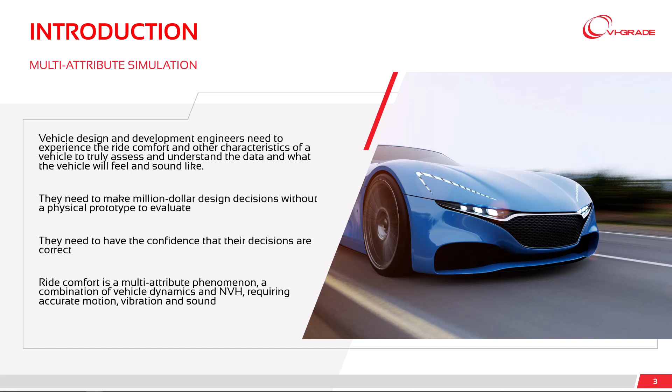A much more efficient approach is to try it before you build it. Eliminate the wasted time and cost of building multiple prototype iterations. Simulate and experience the results of the simulation in driving simulators first. Iterate much faster than previously possible with traditional approaches. This is the faster, easier, and safer approach to developing vehicles.

Now, let's talk about experiential simulation. When you drive your car, you excite different frequencies and therefore experience motion, vibration, and sound all at the same time. Usually, these characteristics are studied and engineered separately. Usually, development activities are carried out separately on separate prototypes or using separate CAE simulation models.

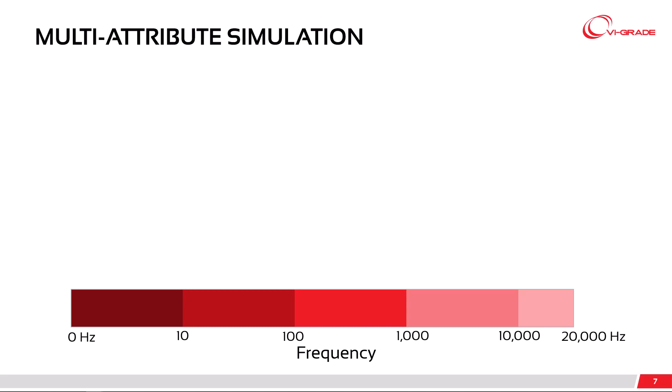But it's not just about how the car handles or rides and what it sounds or feels like, but all of these things together. Ideally, you would experience all aspects of a vehicle simultaneously when driving a virtual prototype. When we talk about simulating vehicle dynamics, sound, and vibration together, we need to define and understand the frequency ranges involved.

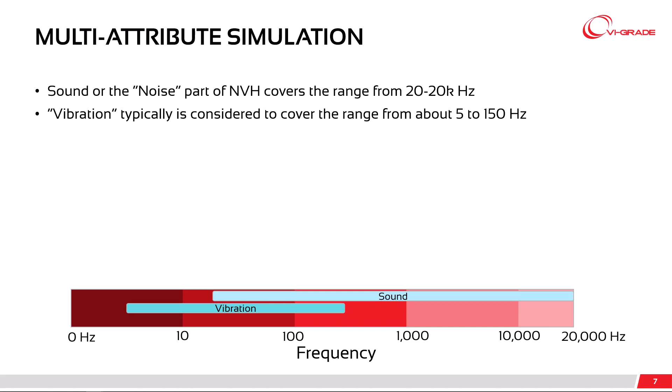Sound, or the noise part of NVH, generally covers the range from 20 Hz to 20 kHz. Vibration is typically considered to cover the range from about 5 to 150 Hz for the purpose of in-vehicle driver and passenger perception. Motion, the overall movement of the vehicle, is usually considered to be the 0 to 8 Hz range. Sound, vibration, and motion all interact and affect the overall perception of each other, especially in the overlap regions.

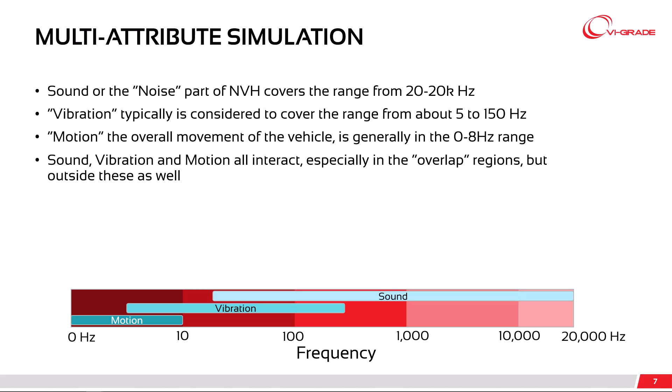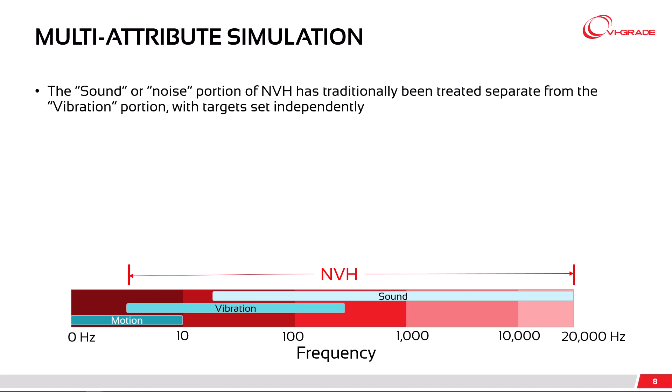The sound or noise portion of NVH has traditionally been treated separate from the vibration portion, with targets set independently. Likewise, vehicle dynamics, ride, and handling have typically been separated from sound and vibration. Again, especially in the overlap region, but not limited to this, there is a high degree of interaction, especially between what is considered ride quality and what is considered vibration.

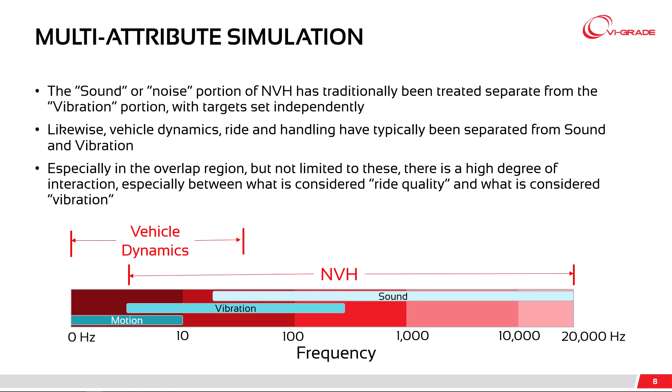A simulator that could accurately represent vehicle motion, ride, and handling together with accurate vehicle vibration and sound to a level of fidelity sufficient for target setting, evaluation, and confident decision-making is the goal.

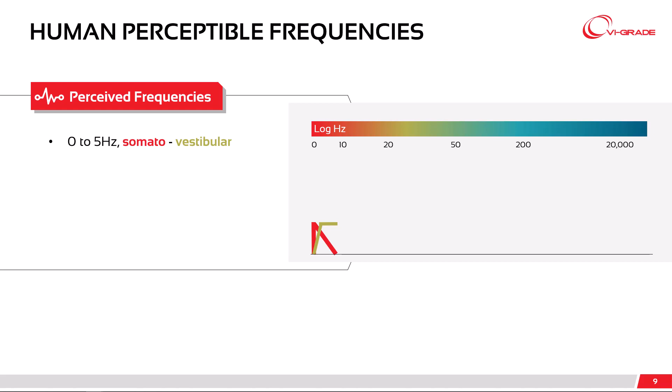As another viewpoint on the same concept, handling, ride, and ride comfort, vibration, and sound cover overlapping frequency ranges. From 0 to 5 Hz, the perception is primarily somatovestibular. From 5 to 30 Hz, this transitions to vestibular vibrational. From 10 to about 150 Hz is the range thought of and perceived as vibration. And spanning from 20 Hz to 20 kHz, the ears perceive sound.

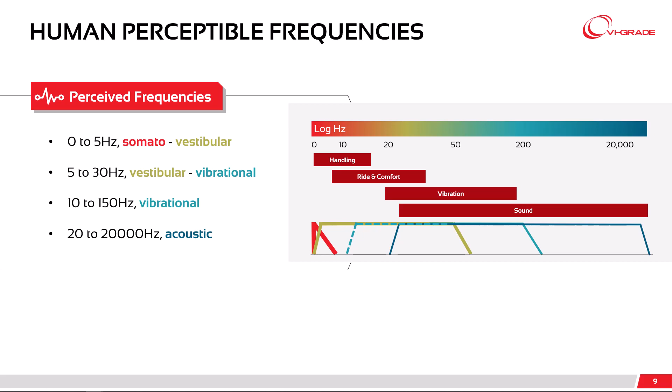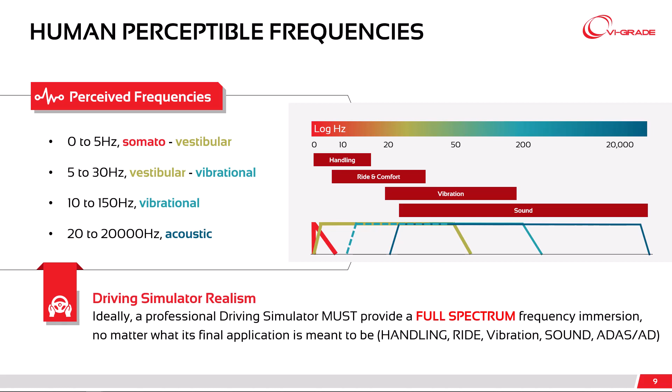Ideally, a professional driving simulator must provide a full spectrum frequency immersion, no matter what its final application is meant to be. When we look at how to build a multi-attribute simulator, it's useful to look at the various stages that comprise the overall experience. We start with handling, which is primarily 3 degrees of freedom up to approximately 15 Hz. This is the overall behavior of the vehicle.

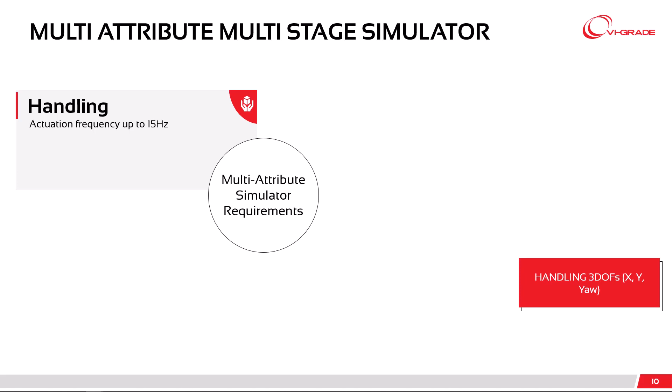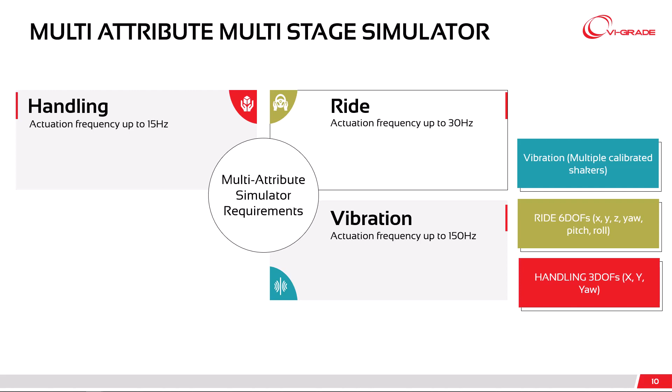Next is ride, which comprises 6 degrees of freedom up to about 30 Hz. Overlapping this, and perceived more locally at the driver touchpoints, is vibration, which extends up to about 150 Hz. And on top of this, we have sound, which covers the range from 20 Hz to 20 kHz.

Now we can take a look at a single attribute simulator. The NVH desktop simulator is essentially a single attribute simulator focused on sound. This has a tremendous capability, and engineers can use this to design the right sound into their vehicle through comparing sounds, modifying sounds, and really understanding the sounds and the way the component parts of the sound add up to the whole. This type of NVH simulator is used extensively in the automotive industry to understand vehicle sound and develop the sound character of vehicles.

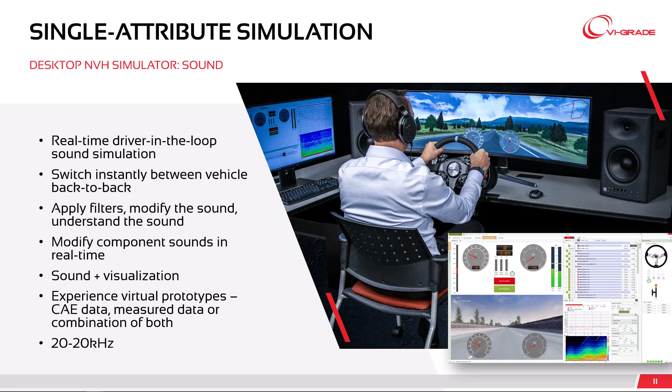But obviously, this is just sound. There is no vibration and no motion. Adding vibration to the sound adds a new dimension to the simulation. In this case, the static NVH simulator combines sound with multi-axial, calibrated vibration at all driver touchpoints. This is a very immersive simulation and could be considered to be a multi-attribute simulation, combining sound and vibration.

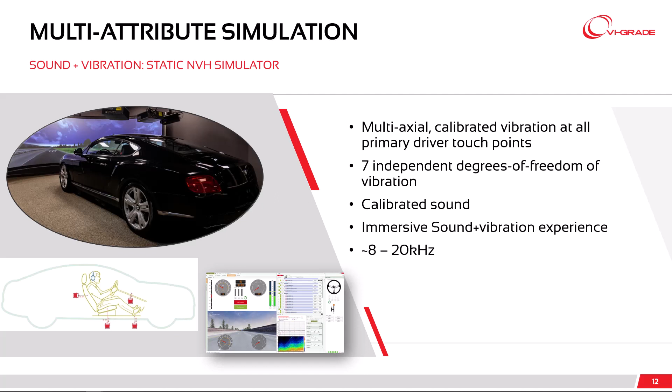Our compact NVH simulator has the same vibration plus sound capabilities as the static simulator, but in a much smaller footprint that can be easily accommodated in or close to the engineering office. Again, this provides the dual attribute simulation of sound and vibration to the design and development engineers.

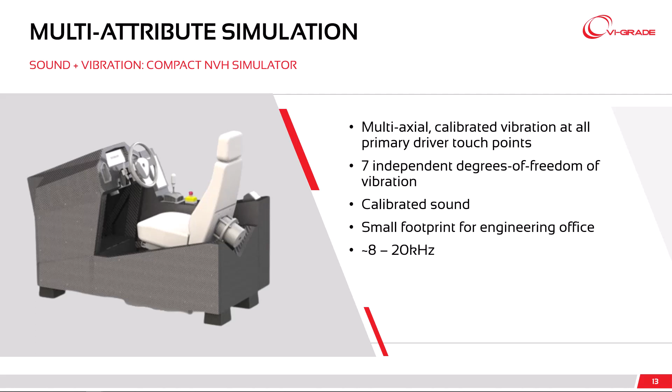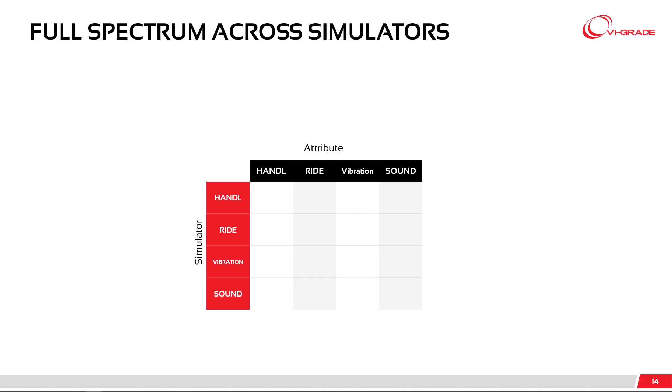Now, let's look at what would be the ideal situation for a full spectrum multi-attribute simulator combining ride, handling, sound, and vibration aspects. We can look individually at each attribute and the inputs to the simulator. For handling, driver demand, vehicle velocity, and chassis accelerations are the primary components provided to and simulated by the simulator.

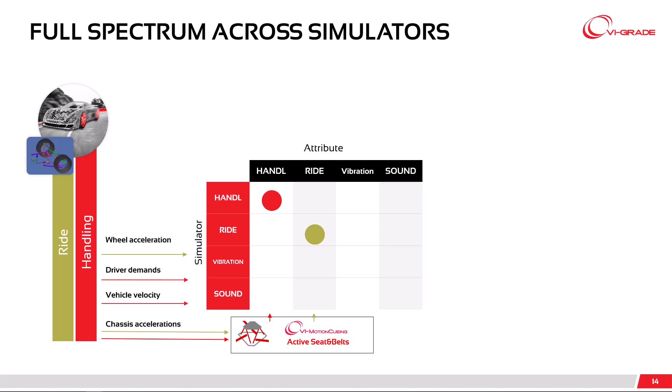Ride is primarily concentrated on the wheel hub accelerations and chassis accelerations. As we move to vibration, we are looking at wheel acceleration inputs, engine, motor, and driveline RPM as forcing functions coupled with vehicle response to these, together with the previous factors. And with sound, we are adding acoustic response to all of these.

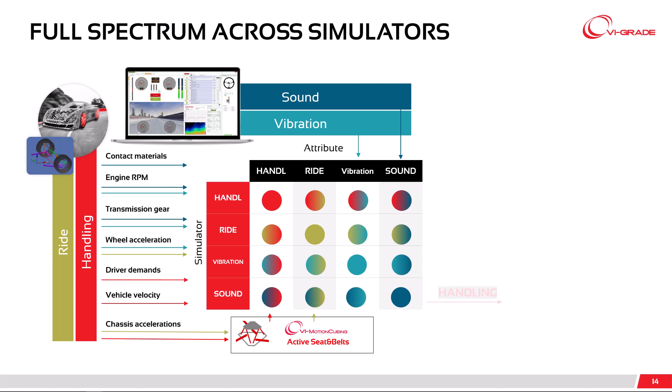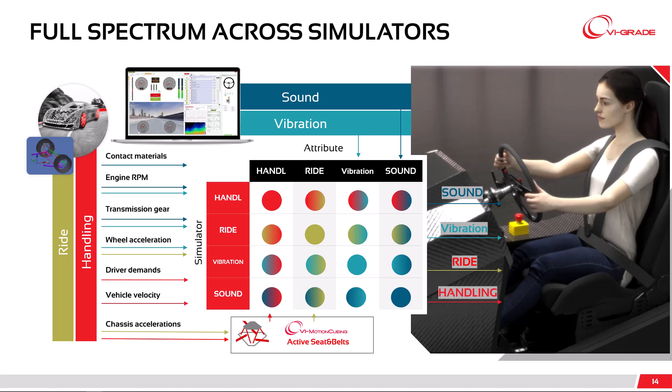The important thing, however, is that these 4 attributes interact and affect one another. In a real vehicle, they are inseparable. In a simulator, in the past, we have typically focused on one or two of these, but never four together, like in a real vehicle. So we decided to combine all of these factors in a single simulator.

The Compact FSS is the first real-time, driver-in-the-loop simulator to combine accurate motion, vibration, and sound in a single simulator. This is especially important when assessing virtual prototypes for things like ride comfort, where motion, vibration, and sound all combine into a single experience for the vehicle occupants.

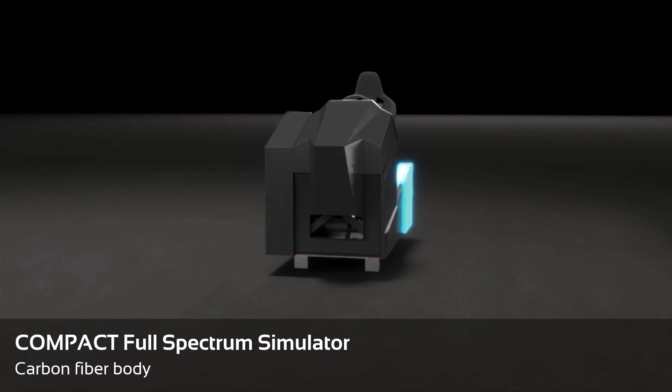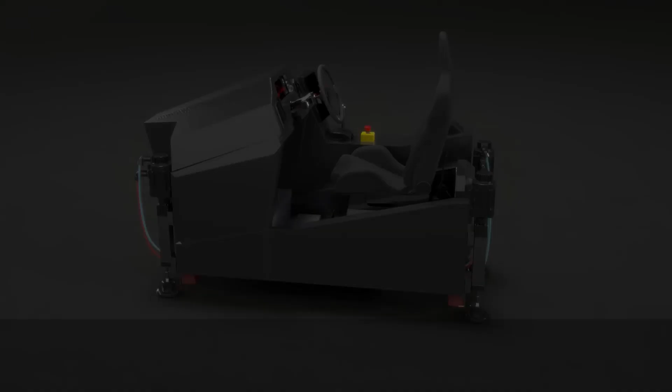Similar to our other compact simulators, it starts with a carbon fiber chassis, which is optimized to be light and stiff for accurate response. The most noticeable feature of the Compact FSS are the legs. These provide roll, pitch, and vertical motion to the simulator to accurately reproduce the motions of the vehicle driving over various road surfaces. The legs provide the low-frequency motion and vibration. Movers are attached to the frame to provide fore-aft motion of the entire simulator.

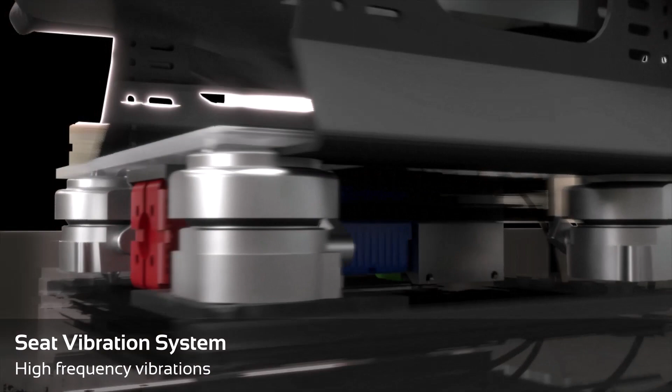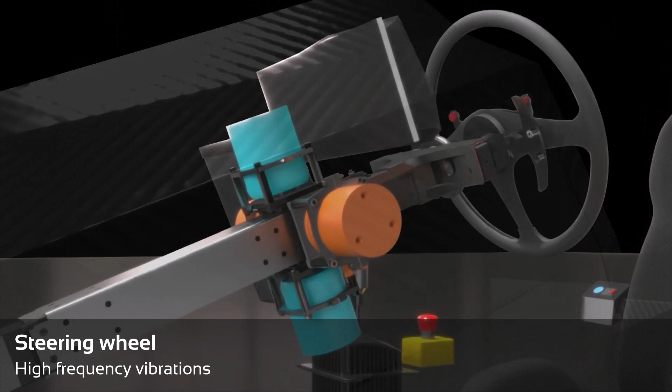For high-frequency vibration, the seat is equipped with 3 shakers providing fore-aft, vertical, and lateral vibration at the seat base. Rubber mounts isolate the seat from the rest of the simulator. This design allows for the mounting of any seat to the simulator. Likewise, the steering system is equipped with 2 shakers to provide vertical and lateral high-frequency vibration to the driver. Accurate sound is provided through calibrated headphones by either VI SimSound or NVH simulator software.

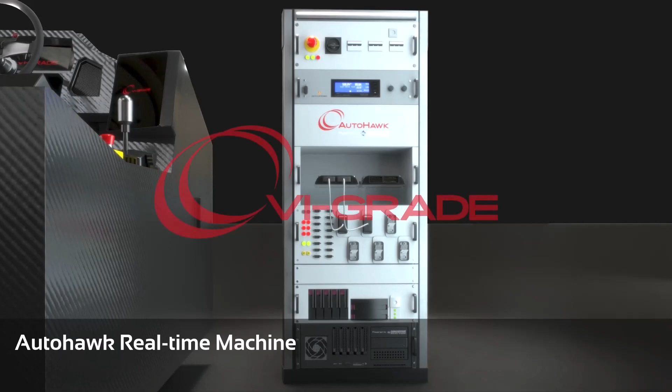All of this is powered by an AutoHawk real-time computer to enable a complete, integrated, real-time motion, vibration, and sound experience. And all of this is contained within a small footprint, so it can be in or near the engineering office. We had the dream of combining the capabilities of our vehicle dynamics and NVH simulators into a single simulator to provide the best, most comprehensive multi-attribute simulation experience. And the Compact FSS is the first simulator to achieve this.

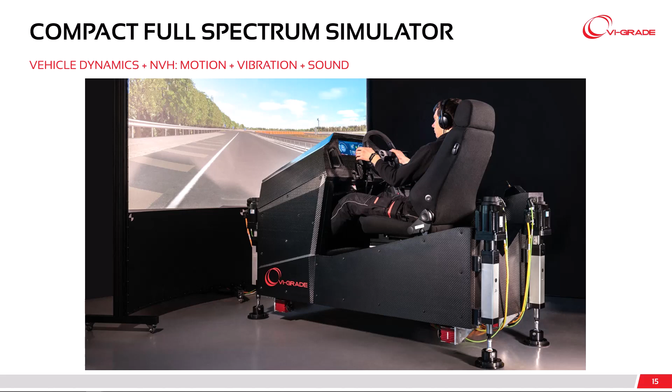This all-new Compact FSS simulator enables you to experience motion, vibration, and sound all together at the same time. It brings together the worlds of vehicle dynamics and NVH into a single simulator. This real-time, driver-in-the-loop simulator provides the motion, vibration, and sound needed to make design decisions with confidence in a small footprint that can be located in or near the engineering office.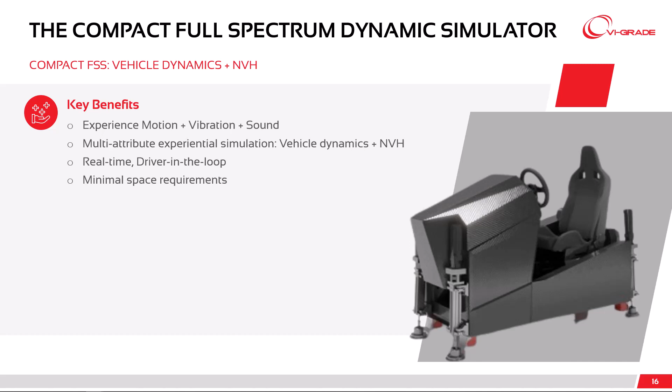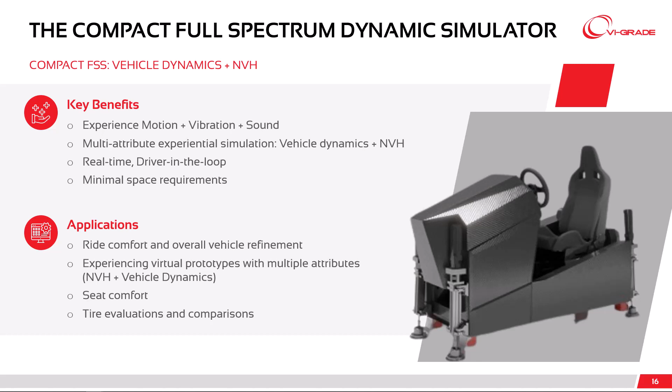One of the applications that this is ideal for is ride comfort, where motion, vibration, and sound all combine into the overall perception of ride quality and comfort. This is sometimes also called vehicle refinement. Of course, one of the primary intents of this simulator is to be able to utilize various types of CAE simulation data to enable the experience of virtual prototypes, eliminating the need for most physical hardware. The Compact FSS lends itself well to seat comfort evaluation and tire evaluations, especially as they affect ride comfort and vehicle refinement.

The most obvious feature of the Compact FSS is the motion system provided by the legs. The legs move the entire chassis of the simulator. Vibration shakers at the seat base provide fore-aft, lateral, and vertical vibration to the seat, and the steering system provides lateral and vertical vibration up to approximately 150 Hz.

Sound is provided from the VI SimSound software or the VI-grade NVH simulator software. And the steering motor is the same steering motor used in all VI-grade compact, static, and full motion simulators. Additionally, the simulator can be equipped with an active seat and active belts, an active brake system, to provide additional cueing and context.

Because of the design of the vibration system, vibration is delivered to the seat mounting bolt locations. This means that you can mount any seat you wish to the simulator and easily change seats. This is a real-time, driver-in-the-loop simulator, but of course it can also be used for fixed driving replay events.

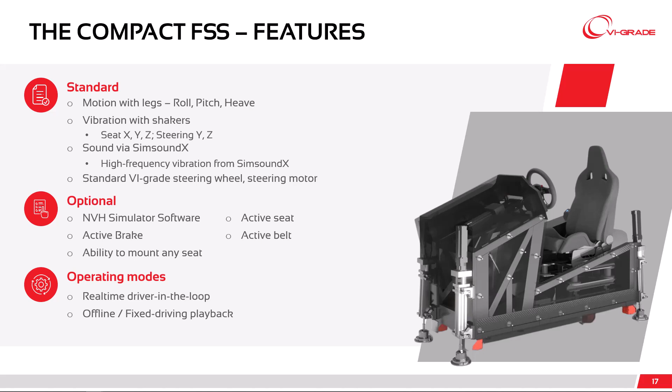You may be wondering how all of this operates. What kind of model is used to provide information to and control this simulator? Here, we are combining two different technologies. For the motion, ride, handling, and low-frequency vibration, the standard VI-grade software stack, including VI DriveSim and VI CarRealTime, are used in conjunction with our standard AutoHawk real-time computer powered by Concurrent.

For sound and vibration, we utilize the NVH software in the form of the VI-grade NVH simulator software, or VI SimSound, to provide sound and vibration synchronized to the motion. And the visual environment is provided by the VI WorldSim software, generating a graphical environment or virtual world in track.

The process starts with a scanned road surface combined with a tire model and multi-body model running in VI CarRealTime, and this is combined with driver inputs, and that generates the response for the motion, vibration, and sound of the system.

The Compact FSS is powered by an AutoHawk real-time PC for motion control and real-time vehicle dynamics, ride, and handling modeling calculations. A Windows PC provides the platform for the NVH simulator software, or SimSound, to provide sound and vibration completely synchronized with the real-time motion.

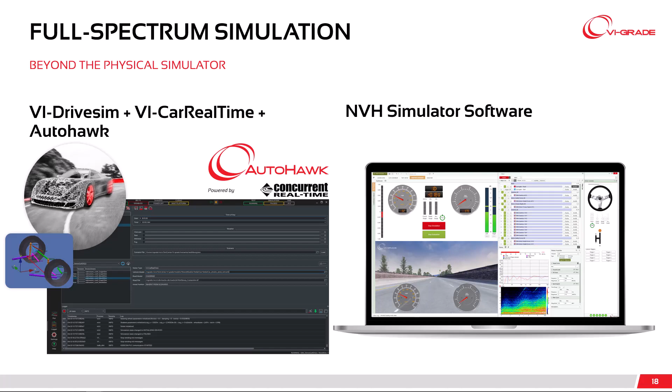VI-grade is well known for having an open environment, able to interact with a number of third-party software products and tools. Many of our customers already have processes and procedures built around various software products, and the VI-grade software makes it easy to incorporate and use these other software tools and products in real-time simulations.

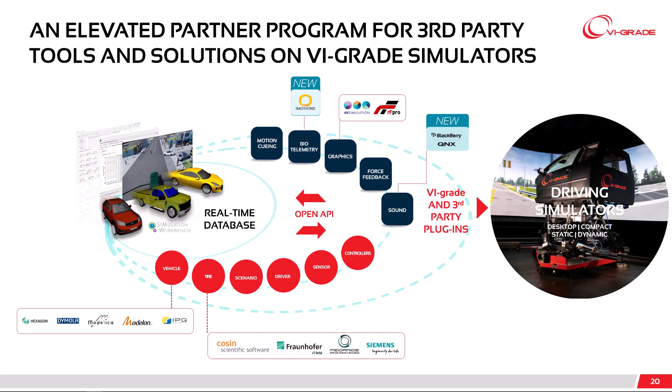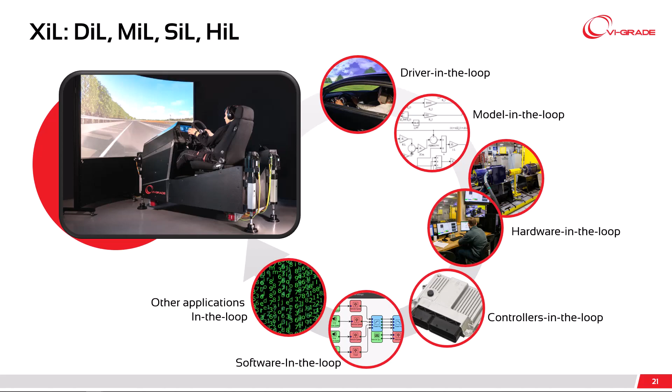In addition to an open approach for software and running numerous third-party software solutions in the loop, VI-grade solutions enable an everything-in-the-loop approach, with capabilities for hardware in the loop, software in the loop, model in the loop, controllers in the loop, and just about anything else in the loop, including, of course, the driver in the loop as well. I have a short video that summarizes the new Compact Full Spectrum Simulator and all we've just discussed.

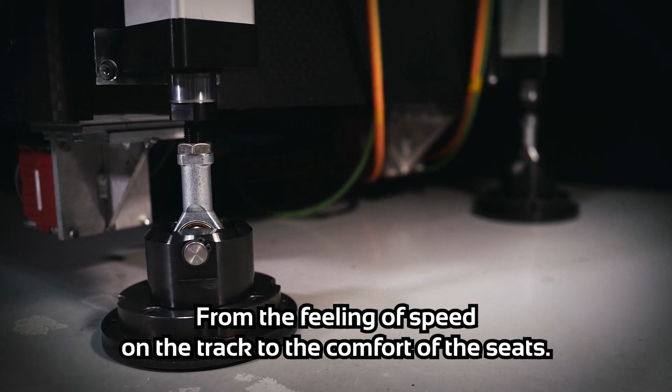In today's fast-paced world of automotive design, decisions need to be made quickly and with confidence. But how can you have confidence in your design decisions without driving and experiencing physical prototypes? Introducing the Compact Full Spectrum Simulator by VI-grade, the ultimate tool for multi-attribute virtual prototyping. With the Compact FSS Simulator, engineers can experience primary ride motion, secondary ride motion, vibration, and sound all at once. This highly accurate simulation is powered by a VI-grade AutoHawk real-time computer running real-time vehicle models. But it's not just about the numbers and graphs. With the Compact FSS Simulator, you experience the full range of vehicle attributes. From the feeling of speed on the track to the comfort of the seats, the Compact FSS Simulator delivers a truly immersive experience. Get out of physical prototypes. Drive, feel, hear, and interact with your virtual prototypes in the Compact FSS Simulator. Experience, understand, and decide with confidence. The Compact FSS Simulator by VI-grade.

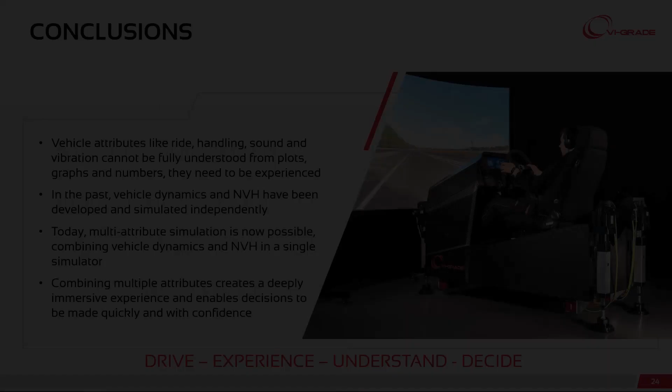In conclusion, vehicle attributes like ride, handling, sound, and vibration cannot be fully understood from the plots, graphs, and numbers we get directly from simulations. These are valuable in themselves, but cannot be easily understood in human terms or in terms of how the customer will perceive them. So we need a way to translate those numbers, plots, and graphs into something we can feel, hear, and experience.

In the past, vehicle dynamics and NVH have been developed independently, simulated independently. However, these two aspects of the vehicle very much influence each other when combined and experienced in a real car by the customer. With the new Compact Full Spectrum Simulator, multi-attribute simulation combining NVH and vehicle dynamics is now possible.

You can now feel, hear, and experience all aspects adding up to ride comfort and vehicle refinement together in a single simulator at the same time. Combining these attributes creates an incredibly immersive experience and enables decisions to be made quickly and with confidence.